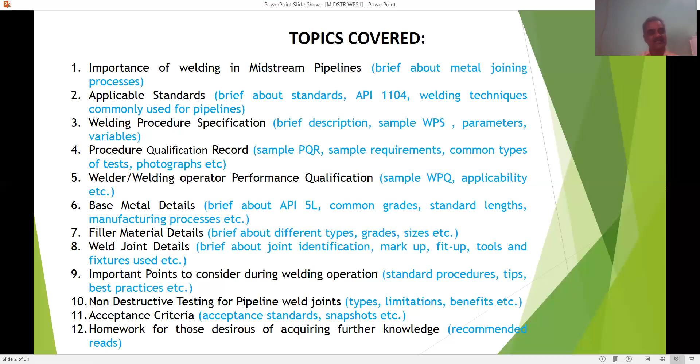Importance of welding process in oil and gas industry. Before we move forward, let us understand why steel is the most preferred choice for oil and gas pipelines.

Steel pipes are much more durable than pipes made out of other materials. The strength of steel pipe enables it to withstand vibrations, shock and high pressure, unlike other metals. Steel will bend rather than break under extreme conditions, helping to prevent spills or leaks.

Custom steel pipes can be manufactured to any dimensions as required by the job specification. They can also be easily modified on site, making them easy to install. Any maintenance or modifications needed after installation can be done quickly and easily because steel is very easy metal to work with.

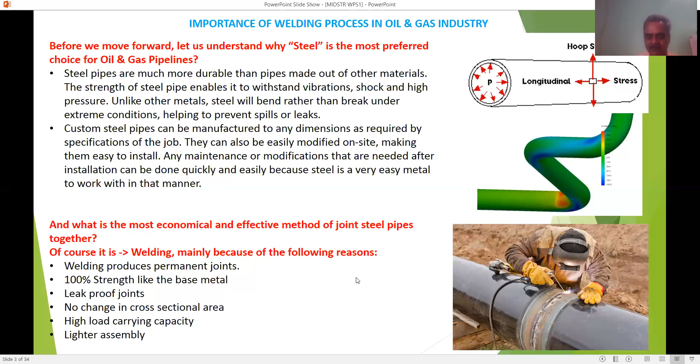Types of welding commonly used in oil and gas pipelines.

SMAW remains the preferred process because it minimizes equipment requirements and skilled operators can consistently produce sound weld beads. On thinner wall pipe, downhill welding enables operators to run hot and fast, increasing productivity compared to welding uphill, which is required on thicker wall pipe to increase heat input and ensure complete penetration.

To control the molten metal weld pool and prevent the slag from rolling in front of the pool, downhill welding requires a fast freezing electrode. Example: you can take 6010 electrode, a cellulose based electrode. These electrodes have a thin coating, 10 to 12% by weight, that contains around 30% cellulose wood flour and associated moisture content.

Other ingredients include sodium silicate binder, titanium dioxide to create a quick freezing slag, deoxidizers such as ferromanganese and ferrosilicon, as well as other elements that vary by manufacturer. These points you should keep in mind.

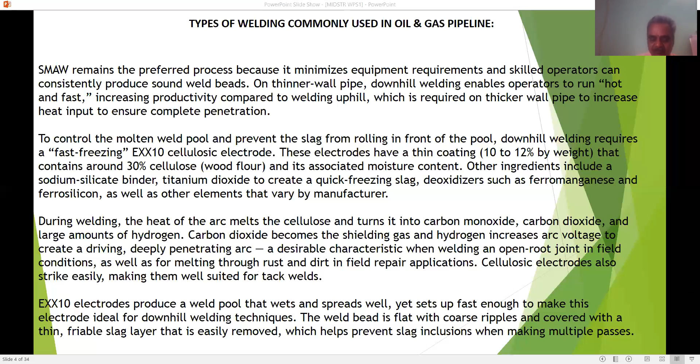Applicable standards for pipeline welding.

First, let us understand why standards are important. Standards enhance the safety of industry operations, assure quality, help keep costs down, reduce waste and minimize confusion. They help speed acceptance and bring products to market quicker, and they avoid having to reinvent the wheel every time a product is manufactured.

You see this? API Standard 1104, Welding of Pipeline and Related Facilities. Errata 1, April 2014. It will be reviewed and updated once in almost 3 years.

Applicable international standards for midstream pipeline welding and related facilities. This standard covers details like welding procedure specification, procedure qualification, qualification of welders, filler metals, joint design and preparation, inspection and testing, NDT and non-destructive testing, accepted standards for NDT, repair and removal of defects, sample templates, forms, etc.

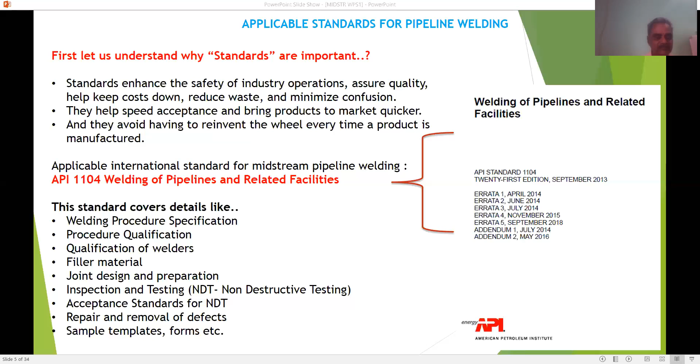See this welding procedure specification. This welding procedure specification is a sample format. It is a formal written document describing welding procedures which provides direction to the welder or welding operator for making sound and quality production welds as per the code requirements.

The purpose of the document is to guide welders to the accepted procedures so that repeatable and trusted welding techniques are used. A WPS is developed for each material, alloy, and for each welding type used. Specific codes and engineering societies are often the driving force behind the development of companies' WPS.

See, this is a joint. How the joint should be, what is the gap required, and root pass, which electrode, which technique, which process, hot pass. Let us discuss what is hot pass, root pass in the next slides, and filler and capping, SMAW.

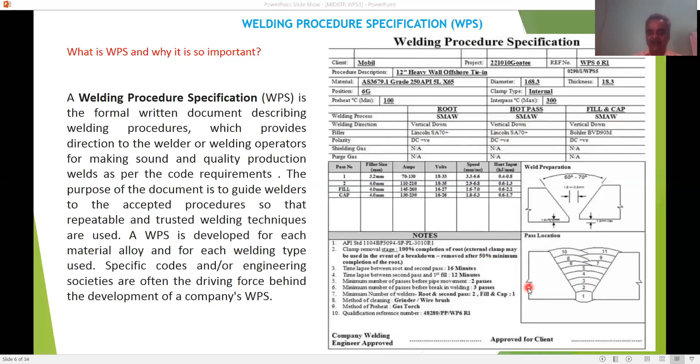See, first we'll try to understand how many WPSs are required during midstream welding, pipeline welding, and what techniques are to be used. Let us see here.

WPS number 1, vertical downhill welding technique. See, mainline welding - when you are joining pipe to pipe in mainline, in 1 kilometer approximately you will get 83 joints, so it depends on the pipe length. Double random pipes will mostly be used. I have briefed what is double random, what is single random in my previous videos, and you can understand. Go through that, you can understand.

The vertical position downhill welding is carried out with a downward progression. Downhill is adequate for thinner steel less than 0.5 inches wall thickness. You can see this - from top, they will come like this. This is called downhill welding.

Okay, dolly mix technique. In this dolly mix technique, the root pass will be welded in uphill progression, and the remaining passes will be in downhill conventional pipeline welding. Welding progression is an essential variable for any welding procedure and has its importance in the soundness and mechanical properties of welds. But why is dolly mix weld technique required?

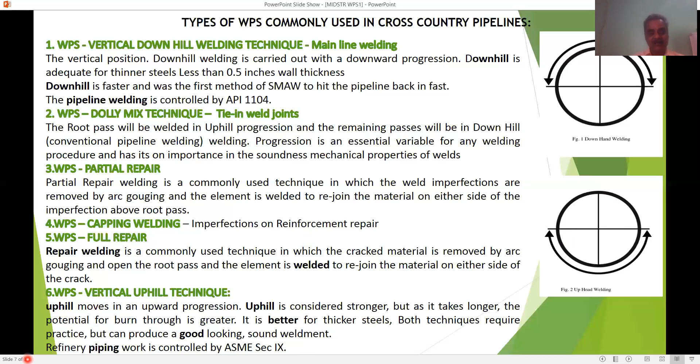Now, PQR, Procedure Qualification Record. Each WPS is supported by a Procedure Qualification Record. A PQR is a record of a test weld performed and tested more rigorously to ensure that the procedure will produce a good weld. See, this is also covered by Section 9.

Boiler pressure vessel code, QW 483, Procedure Qualification Record. These are the tests: T1, T2, type number, breadth, thickness, area, ultimate strength (UTS), fracture location, remarks. So this is just a sample only.

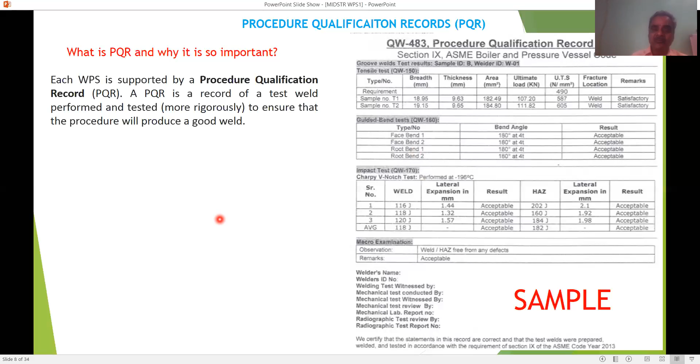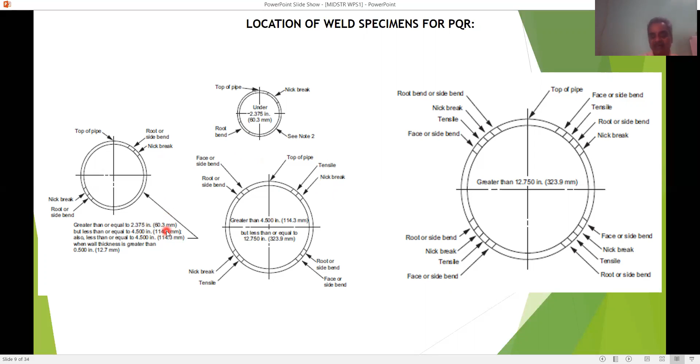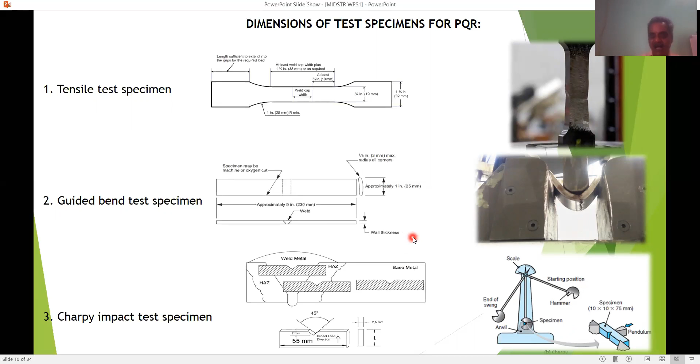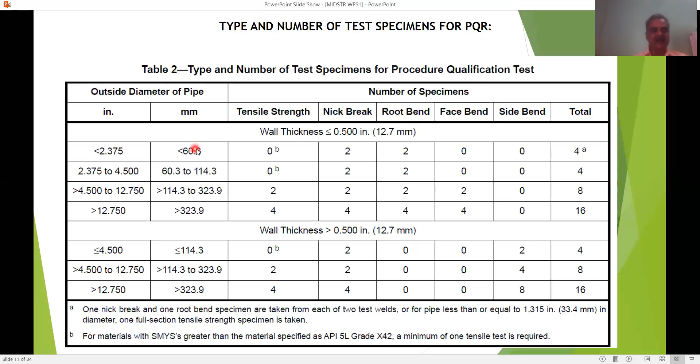Next, Table 2: tensile strength, nick break test, root bend test, face bend test, side bend test, and total tests to be carried out. The locations and diameter ranges are all given in 1104.

At the end, this is the welder PQ, WPQ, and why it is so important. Individual welders are certified with a qualification test documented as a Welder Performance Qualification Record that shows they have the understanding and have demonstrated the ability to work within the specified WPS. So that's the reason: WPS, Welder and Welding Operator Performance Qualification Record.

A form is like this, a standard form. The company or organization provides for a welder: the name, welder number, process SMAW, GMAW, FCAW, position 3G, 4G, 1F, 2F, 3F, 4F—which position and which material, P1 to P8, whatever it is—and electrodes, filler metals, current, DCEP. These are the things reflected in the welder identification card. Wherever he goes, it is a certificate for him, an identity—this welder is qualified in this welding procedure, this thickness and this diameter.

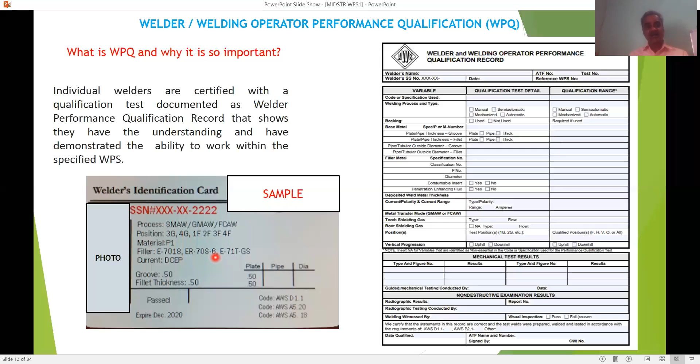Each welding operator shall be qualified by producing an acceptable weld using the qualified welding procedures. The completed weld shall be tested by destructive methods, non-destructive methods, or both, and shall meet the requirements 6.4 through 6.7, except the nick break test as per API 1104.

Nick break test shall not be required. Should a welding procedure qualification utilize a manual or semi-automatic pass as outlined in 12.1, the nick break test in 5.6.4 shall be required as part of the welding operator qualification. The tensile strength test shall not be replaced by the nick break test.

Prior to the start of welding, each welding operator shall have received adequate training in the operation of the welding equipment. If the welding procedure involves more than one operation, the welding operator shall be qualified on the type of welding equipment that will be used in production welding.

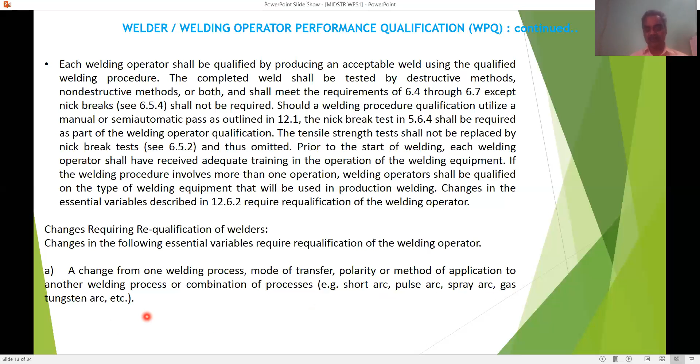A change in the direction of welding from vertical uphill to vertical downhill or vice versa. A change in the filler metal type - solid wire, metal core, flux core. A change from the specified OD group to another - OD less than 12.75 inches (323 millimeters), and OD equal to or greater than 12.75.

These are essential variables. A separate qualification is required for all these points. The welding operator shall qualify on the heaviest specified wall thickness that the welder operator will weld in production.

A change in position from that which the welder operator has already qualified, for example a change from roll to fixed, or change from vertical to horizontal. A welder who qualifies in the fixed position shall also be qualified to perform rolled welds within the essential variables qualification. A change in welding bug manufacturer or model.

A change in the method of applying the root bead - external root versus internal root. A major change in joint design, for example from V groove to U groove or J groove, or any change beyond the range established for such factors as root spacing, root face, angle of bevel - these are essential variables. A list of qualified welders, ID cards of welders with complete details, and all records duly signed shall be available.

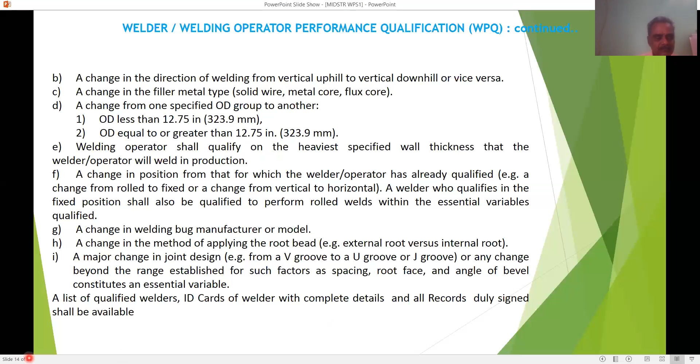As discussed earlier in the presentation, steel is the preferred choice of construction in oil and gas industries. Various different grades of steel are used for manufacturing pipelines. You can see this API specification 5L grade pipe - it is called line pipe.

Applicable specification: API specification 5L line pipe. This specification covers all aspects in detail, including pipe grades, delivery condition, process of manufacturing, starting material, weld seams, heat treatment requirements, chemical compositions, tensile properties, hydrostatic test, inspection, and marking.

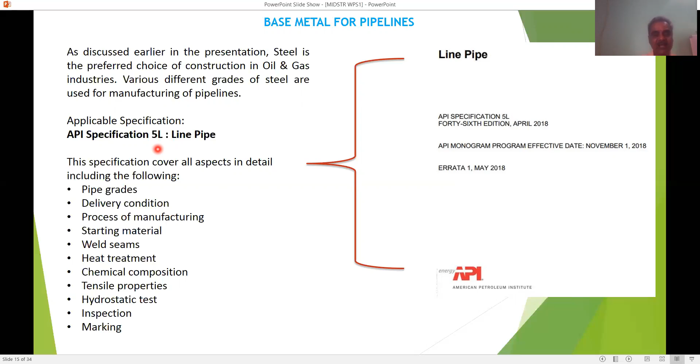Why is it important to understand the base metal properties before deciding on the welding filler metal? You can see these chemical compositions are different. It is right to say that joining together two materials is for the most part a matter of chemistry - which filler metal best matches the base metals. When the chemistry of the base material and filler metals match, the mechanical properties such as tensile and yield strength will also match. Welding operators can rest assured that their weld deposit will have the same strength and properties as the base material.

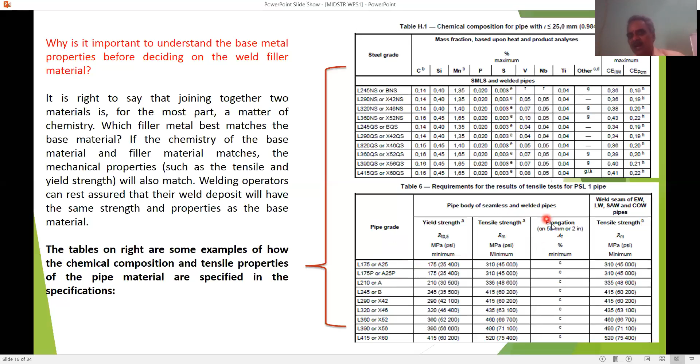A filler metal is metal added in the making of a joint through welding, brazing, or soldering. If you see the ASME Boiler and Pressure Vessel Code Section 2, Part C, Materials - Specification for welding rods, electrodes and filler metals - these are applicable standards and specifications.

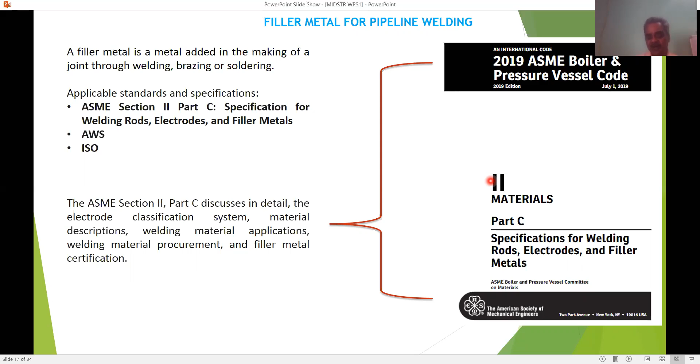AWS, ISO also. ASME Section 2, Part C discusses in detail the electrode classification system, material descriptions, welding material applications, welding material procurement, and filler metal certification. So go through Part C. It is a general grouping of electrodes that contain similar flux or core components and which have similar usability characteristics. You can see this.

Filler metals grouping is as per 1104. Group 1, AWS specification A5.1, A5.5 - AWS classification of electrodes E6010, E6011, E7010, E7011. Group 2, A5.5, where you use E8010, E8011, E9010. Group 3, A5.1 or A5.5: E7015, E7016, E7018, and A5.5 E8015, E8016, E8018. So these are the groupings as per AWS specification.

AWS classification of electrodes and flux core is also available in 1104.

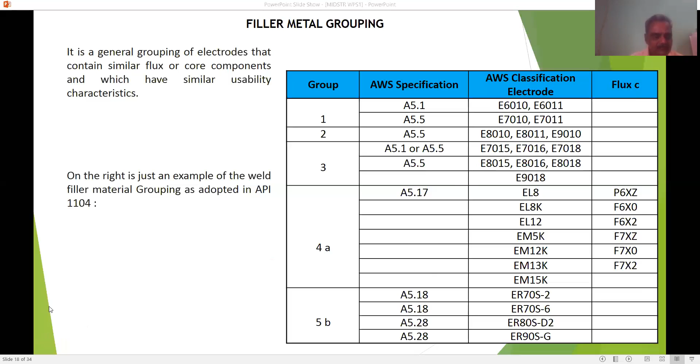Now you see the weld joints, types of welding joints. This is the original surface of work, called V-groove. This is the face, this is the reinforcement, this is the toe on both sides. This is the parent metal. This is the fusion zone, from here to here. And this is the root penetration.

Try to understand this V joint - this is called a butt joint. Types of welding joints: this is a lap joint, this is a corner joint, this is an edge joint. Welding will be done here at the edges. This is a tee joint.

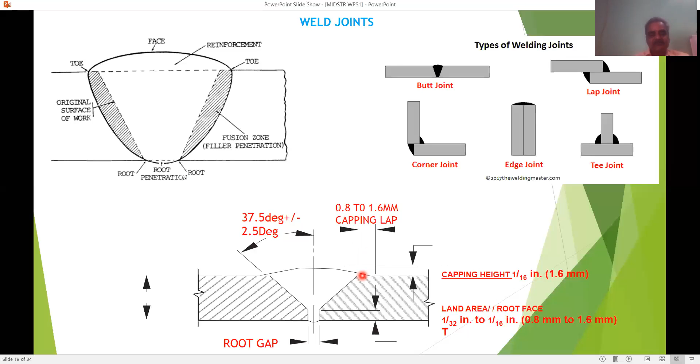As we discussed earlier, this is the parent metal V groove. The first run you do is the root pass - it may be uphill or downhill progression. Number 2 is called the hot pass. Numbers 3 and 4 are filler passes. Number 5 is capping. So this is the terminology in the weld V-groove joint.

Root pass is a string bead. All other passes are weave beads. What is a string bead, what is a weave bead? String bead means you hold the electrode straight, moving upwards or downwards in one direction - that is called string bead. Weave bead means you move the electrode side to side in the weld joint, like a zigzag pattern.

A welder, during the welder qualification test - you can observe these things as an inspector or engineer, for learning purposes.

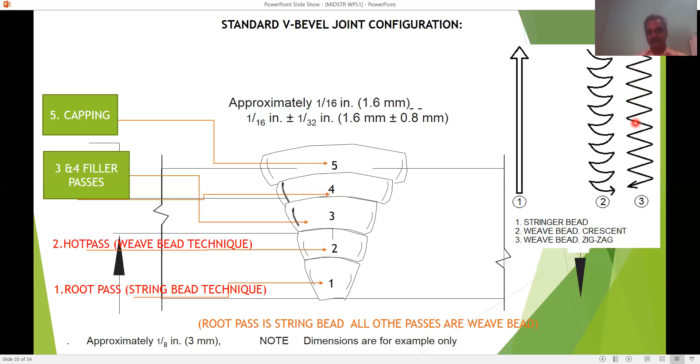This is a pipeline fit-up joint without clamp. This is one pipe, this is another pipe - they join with the tack system. This tacking is called a bridge tack. This bridge tack means they cut a small piece of the same metal as the pipe and place it in the center, welding it on both sides of the piece. Why is a bridge tack required? To prevent damage on the root face or land area of the main welding joint area.

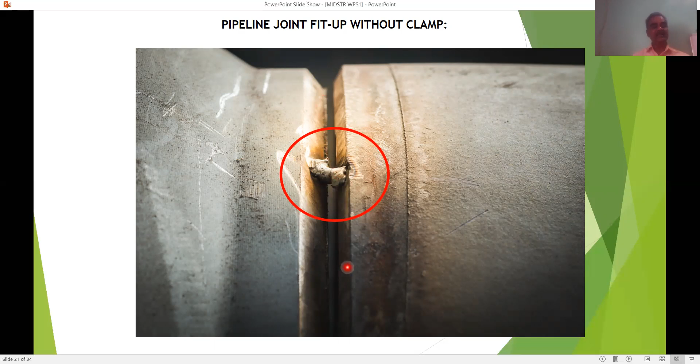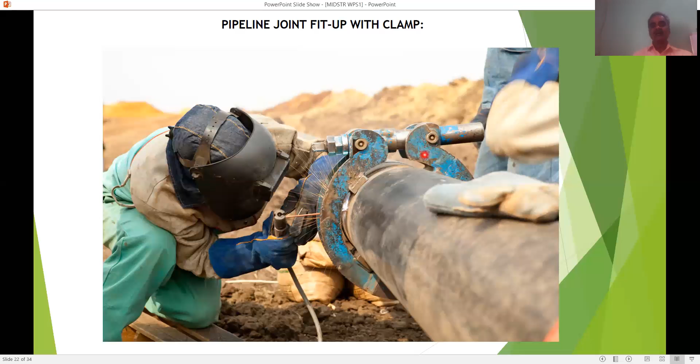This is called an external clamp - pipeline joint fit-up with external clamp. This external clamp is fitted onto the main pipeline, and the welder does the welding. There are certain written documents specifying whether this clamp can be removed after the root pass, or after the hot pass, or must stay till completion of welding - this has to be specified in the specification. So while fitting, they do fitting with the external clamp, and the clamp will be removed once they complete the root pass and hot pass as per the procedure. It is not required to keep it till completion of welding. These are called external clamps - this is manual external clamp, this is hydraulic external clamp.

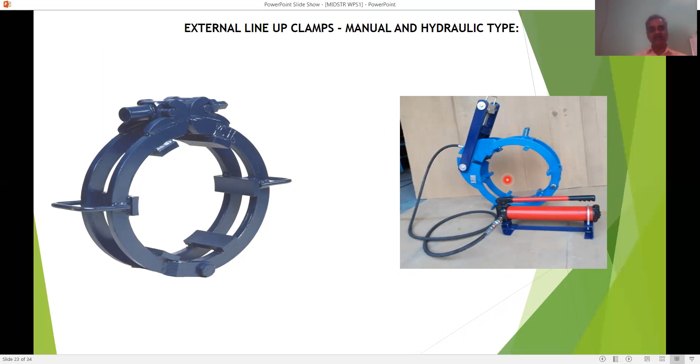Mainly used in the main line. This is an internal clamp - probably used near the tie-in joints. Sorry, these clamps will be used in the main line, and this external clamp will be used for tie-in joints.

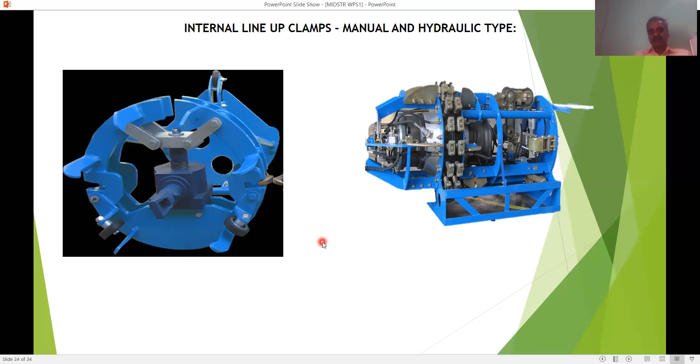Some important points for welding of pipelines - these are the essential variables. Gas and arc welding of butt, fillet and socket welds in carbon and low-alloy steel piping used in compression, pumping and transmission lines. Welding equipment, both gas and arc, shall be of size and type suitable for the work, and shall be maintained in a condition that ensures acceptable welds, continuity of operation, and safety of personnel. Arc welding equipment shall be operated within the amperage and voltage ranges given in the qualified welding procedure specification.

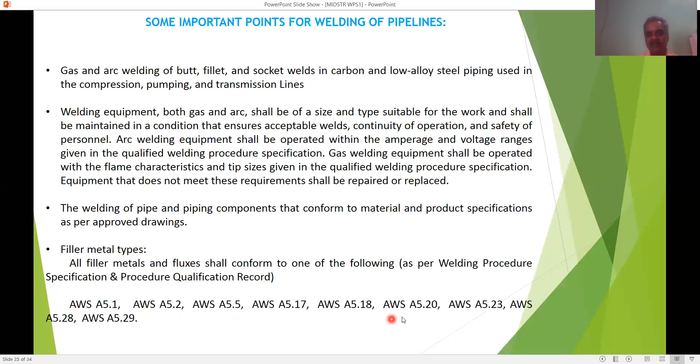The material to which the procedure applies shall be identified, API 5L pipe, as well as material that conforms to the other product specification as per 1104 latest edition. Go through the latest edition and ensure that the latest edition is available in office and site also.

The ranges of specified outside diameter and specified wall thickness over which the procedure is applicable shall be identified. A sketch or sketches of the joint that shows the angle of bevel, the size of root face, and the root opening or the space between abutting members, the shape and size of fillet welds shall be shown.

If a backing is used, the type shall be designated. The sizes and classification number of filler metals and flux, and the minimum number and sequence of beads shall be designated.

The current and polarity shall be designated, and the range of voltage and ampere for each type and size of electrode, rod or wire shall be shown. The size of orifice in the torch, and each size of rod or wire shall be specified.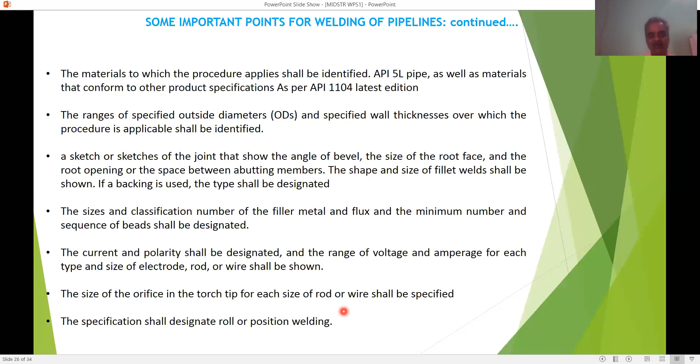The specification shall be designated roll or position welding. The specification shall be designated whether the welding is to be performed in an uphill or downhill direction.

The line pipe clamp, the line-up clamp, is to be internal or external, or if no clamp is required. If a clamp is used, the minimum percentage of root bead that shall be completed before the clamp is released shall be specified.

Filler metals, fluxes and inert gases shall be stored and handled to avoid damage to them and to the containers in which they are shipped, and a written work instructions document shall be established for storage of electrodes, filler metals, and inert or active gases or mixtures of such gases. The document shall be approved by the management representative.

All necessary welding procedures shall be established as per API 1104 latest edition only. Before production welding is started, a detailed welding procedure specification shall be established and qualified to demonstrate that welds with suitable mechanical properties such as strength, ductility, hardness, and soundness can be made by the procedure. The quality of the weld shall be determined by destructive testing.

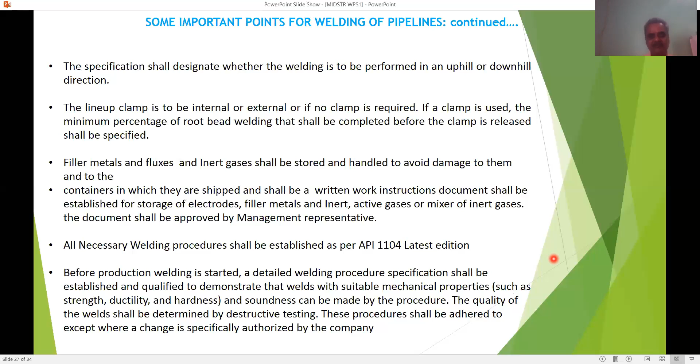These procedures shall be adhered to except where a change is specifically authorized by the company. The maximum time between the completion of the root bead and the start of the second bead, as well as the maximum time between the completion of the second bead and the start of the other beads, shall be designated and recorded.

Indicate whether power tools or hand tools are to be used for cleaning purposes, grinding, or both. And specify preheat, post-weld heat treatment requirements, and preheat and post-weld heat treatment temperatures.

So every company should establish PWHT procedures. If required, they can apply that specific procedure.

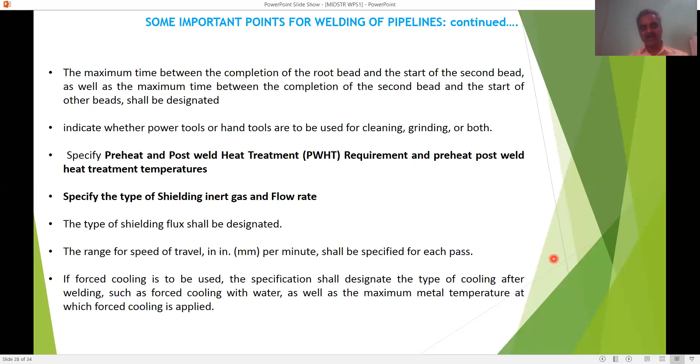Specify the type of shielding inert gas and flow rate. The type of shielding flux shall be designated. The range for speed of travel in inches or millimeters per minute shall be specified for each pass. If forced cooling is to be used, the specification shall designate the type of cooling after welding, such as forced cooling with water, as well as the maximum metal temperature at which forced cooling is applied.

Position: a change in position from roll to fixed or vice versa constitutes an essential variable. Wall thickness. Filler metal as per group and suffix number specified in API 1104. For any filler metals with a G suffix designation only.

A change in the manufacturer's or trade name, for any filler metals with a G suffix designation only. A change in the manufacturer's or trade name.

Materials with SMYS greater than or equal to that of material specified as per API 5L grade X65. Any change in the AWS classification of the filler metal.

Electrical characteristics: AC to DC or vice versa. Specify essential variables. A welding procedure shall be re-established as a new welding procedure specification and shall be completely requalified when any of the essential variables are changed as specified in API 1104 latest edition.

Welding procedure, process, or method of application. Base materials: SMYS less than or equal to that of material specified as per API 5L grade X42. Joint design.

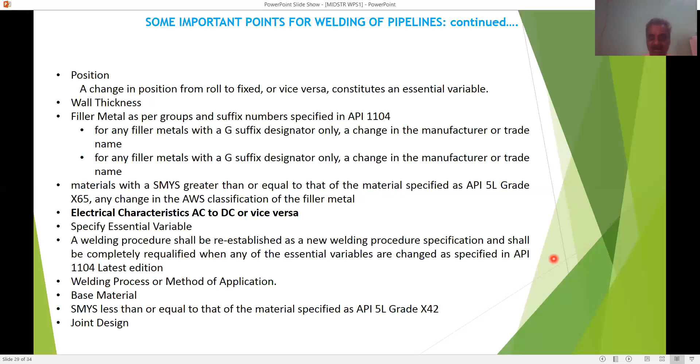Orifice diameter, orifice gas composition. For plasma arc welding, a change in orifice gas nominal composition or a change in orifice diameter. Method of cooling after welding.

An increase in the maximum weld temperature prior to forced cooling, or a change in the method of cooling after welding resulting in a higher rate of cooling, also requires requalification of the welding procedure.

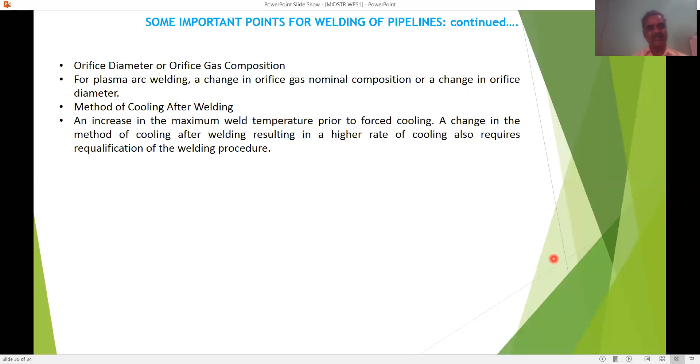These are the essential variables. Now, NDT methods, non-destructive testing, for pipeline weldings.

Commonly used NDT techniques: visual inspection. Once radiography is completed, you will observe the imperfections, maybe in the root pass or in capping.

Special qualification and training is required to interpret the radiographic test, and also for magnetic particle test, liquid penetrant test, and ultrasonic testing. These are the main methods applied for non-destructive testing.

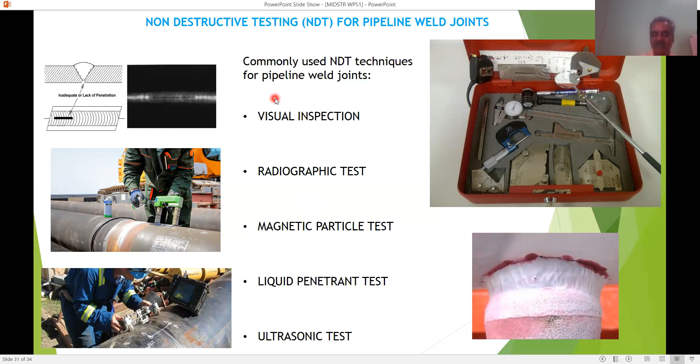Acceptance criteria for NDT. Indications identified using any NDT method are accepted or rejected with reference to the standards. The standards which the client accepts or specifies for production are called acceptance criteria. These are the acceptance criteria as per 1104.

The client says some porosity is acceptable for me, because design criteria is most important.

Any imperfection in the root pass shall not be acceptable. Any imperfection which is not meeting the specific criteria is also not acceptable. But the second point depends on the client's requirement and specification.

If the client says, okay, above the root pass, accept the porosity, some length, some clusters is acceptable, then okay. Because the client will specify as per operating parameters, design thickness, flow rate of the fluid, operating pressures, and velocity.

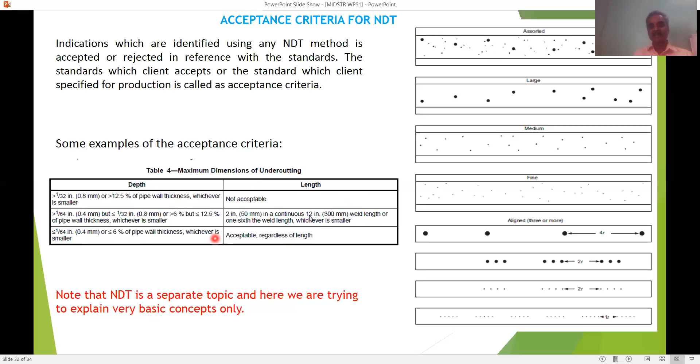Now this is last, but not least: homework for those desirous of acquiring further knowledge. In this video, efforts have been made to give an overview of the minimum basic knowledge required for young professionals to build a strong foundation in pipeline welding, midstream pipelines. However, for effective learning and longer retention, some further studies are recommended below as homework.

Repeatedly watch this video and previous videos, and try to make your mind to do some homework. What is the homework? Revise and refresh your knowledge about welding process essential variables.

Instead of academic books, try to read books published for industry. One example is the Welding Handbook, published by AWS. Go through this book, you will gain good knowledge. That exercise you have to do as homework.

Increase your knowledge about different international standards and their applicability. Some examples: ANSI, ASME, API, ASTM, BS, ISO, NACE, IS, DIN, JIS. These are different international standards, also available on the net, or in college or company libraries. Go through these international standards and try to enhance your knowledge.

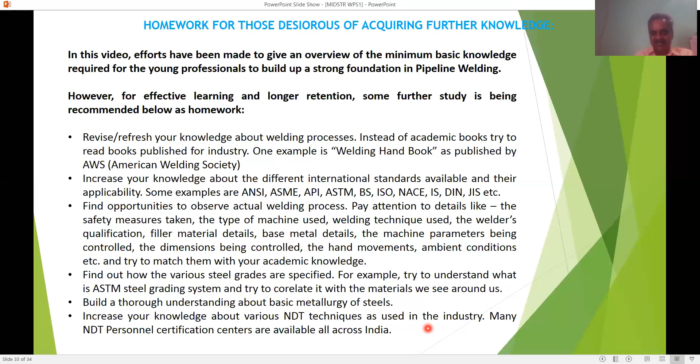Increase your knowledge about various NDT techniques used in the industry. Many NDT personnel certification centers are available across India. I recommend going to NDT companies, very famous ones like BHEL in Visakhapatnam, and many other NDT companies. Go there, they are all professionals, level 3 professionals. Take advantage of the learning opportunity and qualify for NDT techniques as per ASNT level 2.